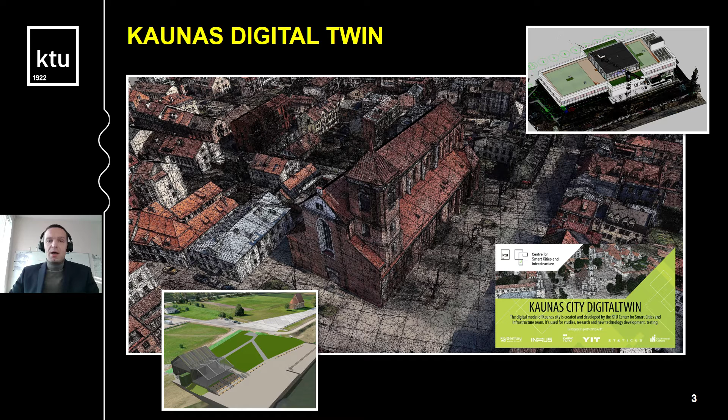The main project's platform is Bentley's OpenCities Planner and currently accommodates the results of research and study projects. Our main achievement and ongoing goal is to integrate different digitalization technologies of the built environment by applying them to practical real-world tasks.

Let's dive into technology and discuss two states of digital twin. The first state represents the existing situation of physical environment. The Kaunas Digital Twin implements state-of-the-art digitalization technologies such as photogrammetry, LiDAR, thermophotogrammetry, and 360 panoramas. The next one is BIM, which is appropriate to distinguish into 3D model and attribute parts.

BIM is slow, but gives huge opportunities concerning semantics, attributes, classes, distinct elements. IoT and various APIs are unique in dynamics, which could provide periodically updated data from any sensors, device, or equipment. It's popular to store data in a database and spread it through standardized protocols.

Finally, we can't avoid historical data, which is usually CAD-based and without affordable machine readability. Anyway, during the past decades, humanity collected much data about the built environment.

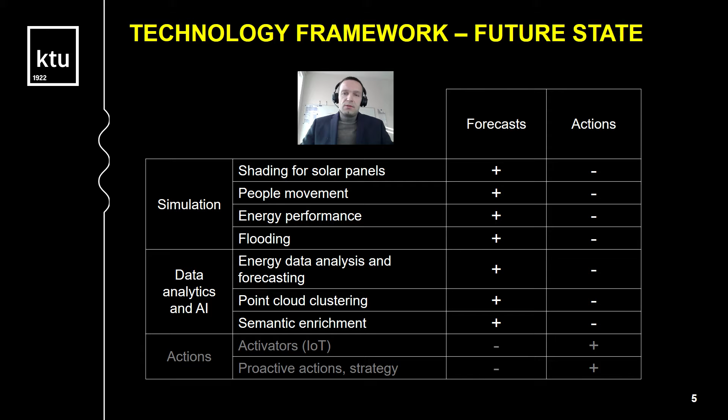Now let's illustrate some of the use cases. For example, the flood simulation carried out with Bentley's LumenRT software allows for the assessment of potentially risky areas in the territory, and on that basis preventive decisions could be taken for the protection of buildings, utilities, or other objects.

The impact of shading on PV solar panels is a significant factor in achieving efficient electricity generation. In this case, a reality capture serves as a guide for the possible placement and orientation of the panels on horizontal, angled, and even vertical surfaces of the built environment.

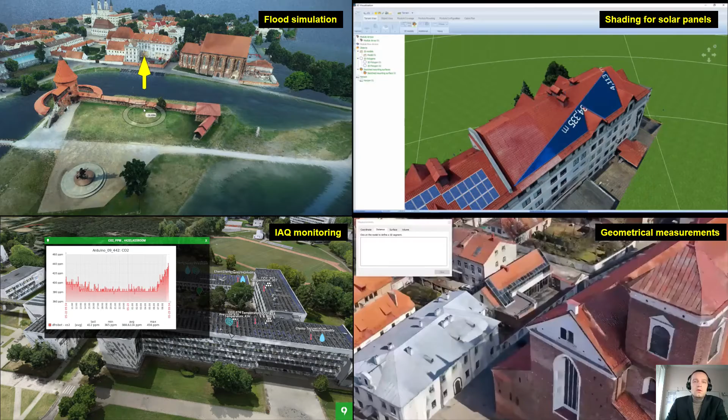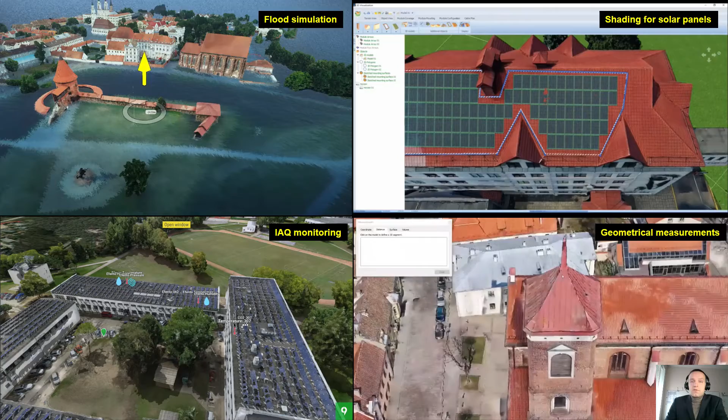Indoor air quality monitoring is an important factor to ensure efficient use of thermal energy, supply of fresh air, and maintenance of optimal relative humidity. Based on the results of the monitoring, adjustments to the HVAC system could be made in premises or zones.

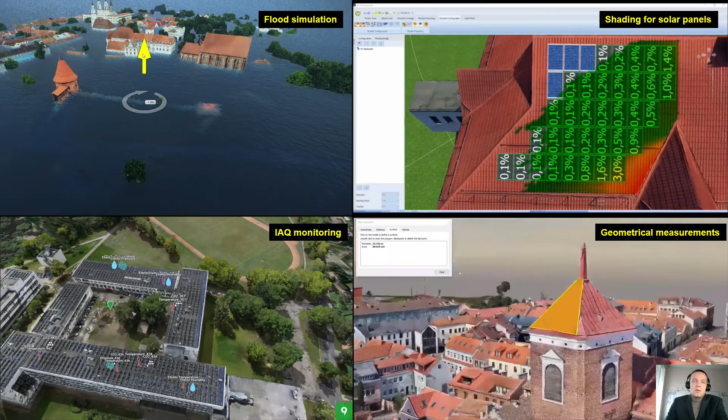And geometric measurements, which can be useful in a wide range of situations. But based on our experience, it is important to have an assessment of the geometric dimensions of the building when it comes to renovation. Dimensions provide the basis for the production of customized prefabricated building elements, thus significantly reducing construction time.

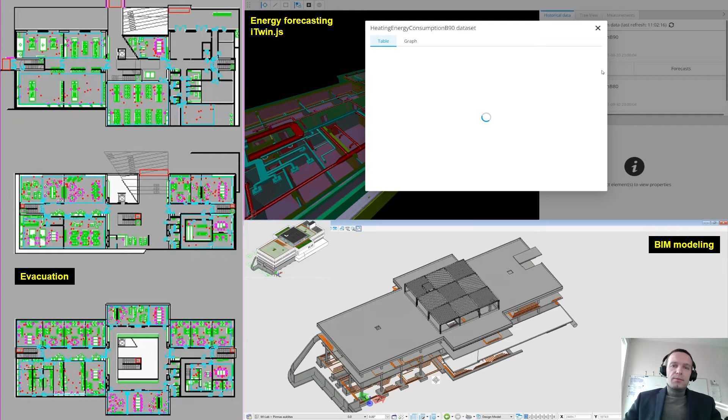This building is called MLab. It's a prototyping laboratory, one of the most modern buildings on the KTU campus, which is part of Kaunas Digital Twin, and for which the CSCI team has carried out various digitalization activities.

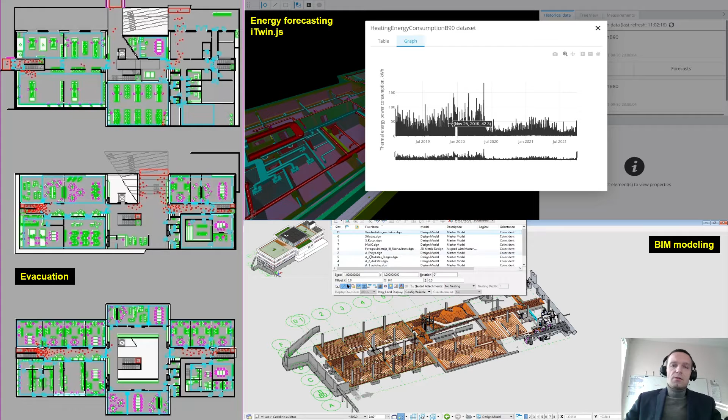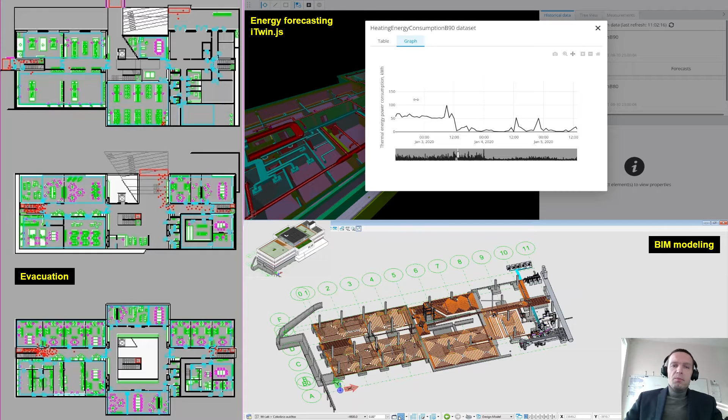We used Bentley's Open Buildings Designer for BIM modeling by focusing not only on creating a geometric representation of the architectural, structural, and MEP systems, but also on the semantics, I mean standardized attributes. As well, it's worth mentioning that this BIM model is classified according to the National Construction Classification System. Particular attention is paid to proper export to the IFC format by checking and linking classes, types, and their properties.

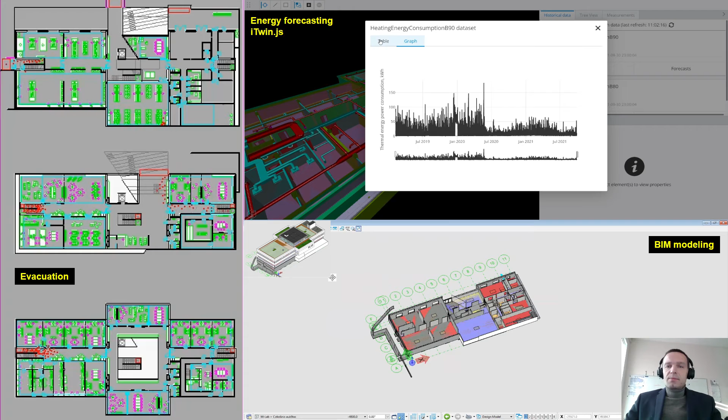Also, we have used the iTwin.js platform to integrate BIM, IoT, and API data to develop an algorithm for predicting thermal energy consumption by using machine learning algorithms. Currently, linear regression and XGBoost machine learning methods were used for the forecast. However, any AI approach could be implemented.

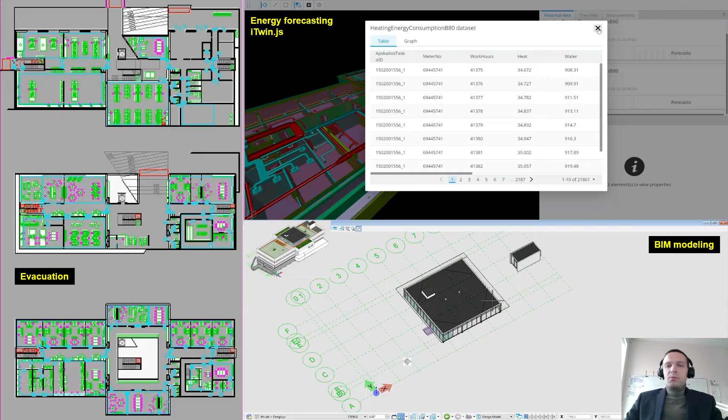Bentley Legion software was used to simulate the evacuation of people from a building. This way we can see the risk areas where people are crowding and take preventive actions, such as distributing the flow evenly according to the capacity of the exits.

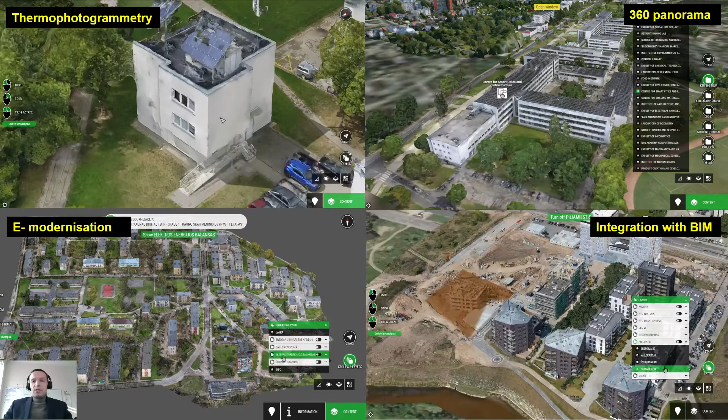Let me introduce more implementations within the OCP platform. Thermophotogrammetry, the technology which enables the creation of a 3D thermal model that can be used to assess the heat loss of the building or the thermal energy performance of an entire block.

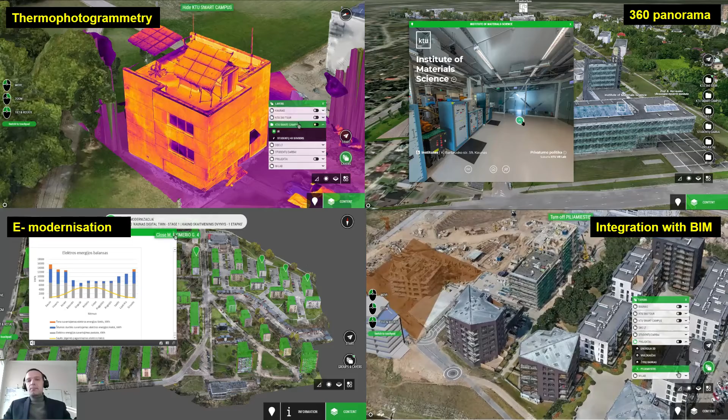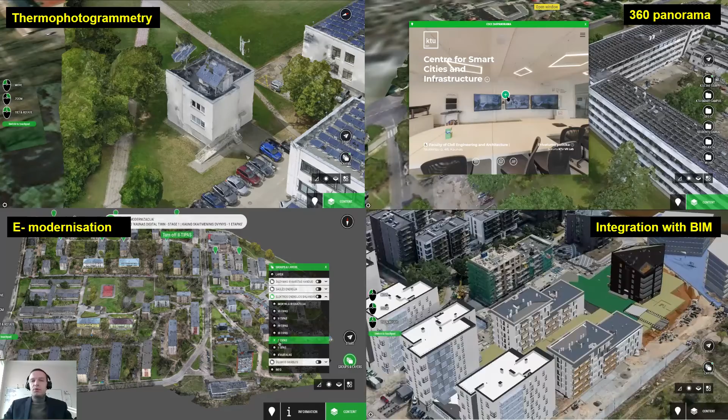The 360 panorama technology allows for visual representation that can be useful in asset management, tracking of construction progress, or other use cases. In an urban context, it's a useful technology to provide more information about the building indoors. Integration with BIM enables projects to be presented to the public, evaluated in an urban context, or for tracking construction progress. In the future, we can see very useful integrations using the semantic part of the models.

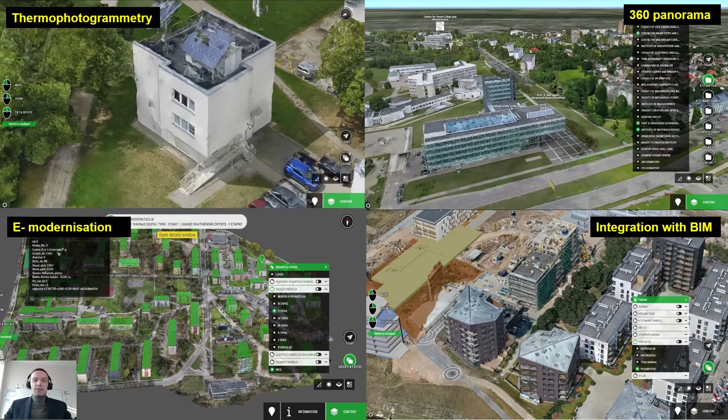E-modernization is another Kaunas Digital Twin sub-project, which aims to assess a residential neighborhood as an independent energy island, using 3D model data and integrating the results into the digital twin. For this purpose, calculations were applied for the use of different energy sources, assessing the consumption and economic aspects of solar energy, heat pumps, electricity grid, and centralized heating networks.

As I mentioned before, the main Kaunas Digital Twin platform is the Open Cities Planner, which we believe has progressed significantly in the last few years. Various integrations have emerged that have allowed us not only to host reality capturing data, but to integrate some subsets of BIM models and stream data through HTML embeddings and other sources.

And finally, iTwin.js, which we started using 2 years ago, attracts developers and seeks interdisciplinarity between information technologies and civil engineering fields.

Let's summarize some points. The main challenges we faced basically are related to interoperability, the lack of implementation of standardized data formats into the software, especially the semantic part. However, in this case, iTwin.js helped to deal with these issues because it has strong customization capabilities.